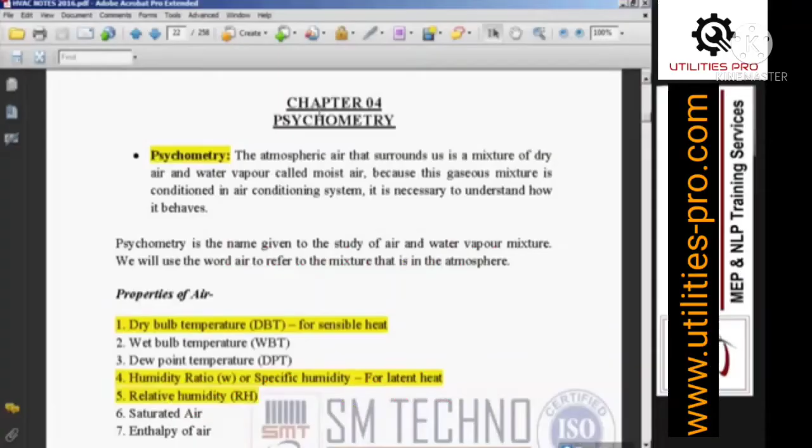Psychometry, chapter 4. Without psychometry, you cannot think for designing, HVAC designing.

So what is psychometry? This term is taken from Greek language, and the meaning is: psycho means air, metry means measurement. But air means what? Not just dry air. Air means we are talking about the moisture.

For example, in this room, simple experiment. What you do? Take the chill water bottle from the refrigerator and place it in the room. You can watch the video. After some time, don't open that bottle, suppose the bottle is sealed. So after some time, what happened?

On the bottle, you will find droplets, no? Yes. So from where you will get the droplets? From the air, means from the room air, because the bottle is sealed, right? So from the air we'll get that droplet, and that droplet is called dew. Why and how we'll discuss after learning dew point temperature. But with this we can conclude that the air is a moist air, right?

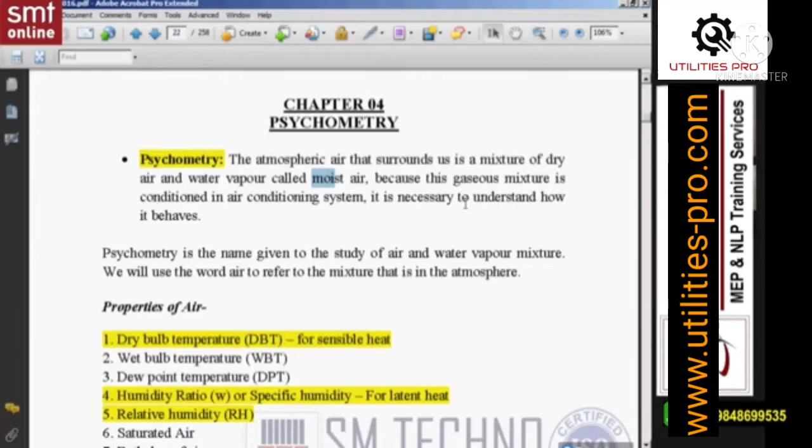So here you can read in the notes, the atmospheric air that surrounds us is a mixture of dry air and water vapor called moist air. Because this gas mixture is conditioned in air conditioning system, it is necessary to understand how it behaves. So what is psychometry? Psychometry is a name given to the study of air and water vapor mixture. We'll use the word air to refer to the air-water vapor mixture, and that is the atmosphere. So if I say air, means by default I'm talking about the moist air, right?

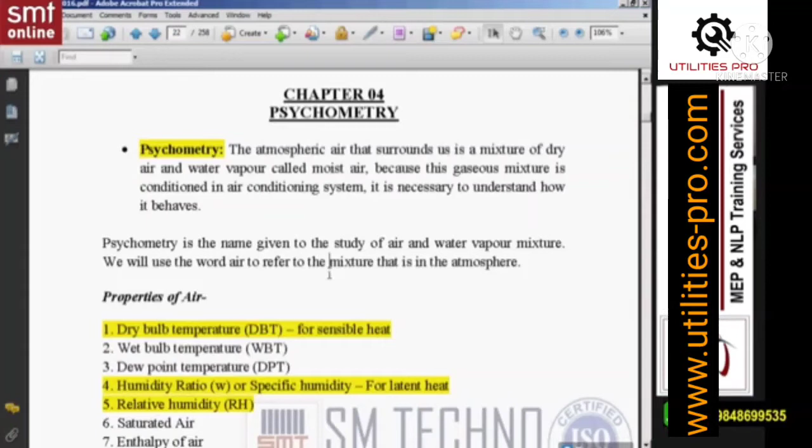So in psychometry we are going to learn the properties of air, the behavior of air, etc., which is very important for air conditioning, right? So let me read the properties first. Properties of air, you can read here from point 1 to 7.

Point 1 is dry bulb. So highlight 1, 4 and 5. Point number 1, dry bulb temperature, in short DBT, for sensible heat. Let me read this, then I'll explain. First is dry bulb temperature, DBT, and for sensible heat. Second is wet bulb temperature, WBT.

Next is dew point temperature, in short DPT. Next we have humidity ratio, also known as specific humidity, for latent heat. And next, relative humidity. Already we learned in the first class relative humidity, RH, for human comfort. So we'll discuss what is relative humidity and what's the difference between the relative humidity and humidity ratio. Next we have saturated air and enthalpy of air.

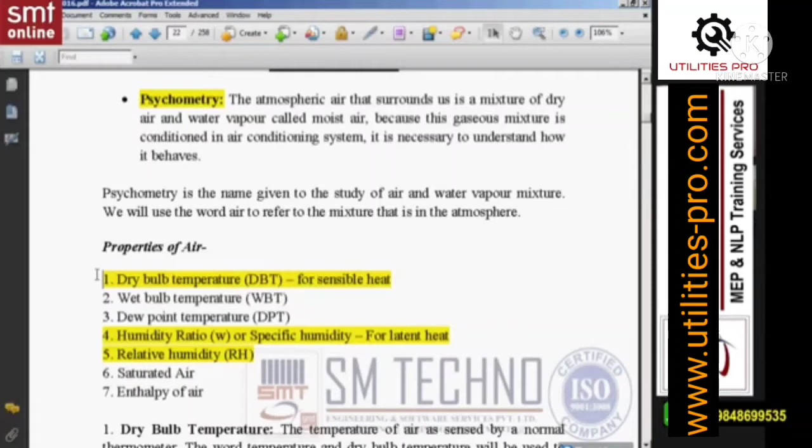Okay, so first, dry bulb temperature. This is simple. For example, if I measure, suppose assume, can you see the video online? Can you see my video? Assume this is a thermometer. Actually it's a digital pen, but think that's the thermometer.

If I measure the room temperature, or if I measure the outside temperature under shade, not directly in sunlight, means under shade, if I measure the outside temperature, means what am I measuring? I am measuring the dry bulb temperature. So don't confuse dry bulb temperature or the temperature, both are same with respect to air.

Suppose today outside temperature was 40 degrees centigrade, means I am talking about dry bulb. Present room temperature, let me check in the remote. Present room temperature is 26 degrees centigrade. Is what? It's a dry bulb, room dry bulb temperature. So temperature and dry bulb temperature both are same.

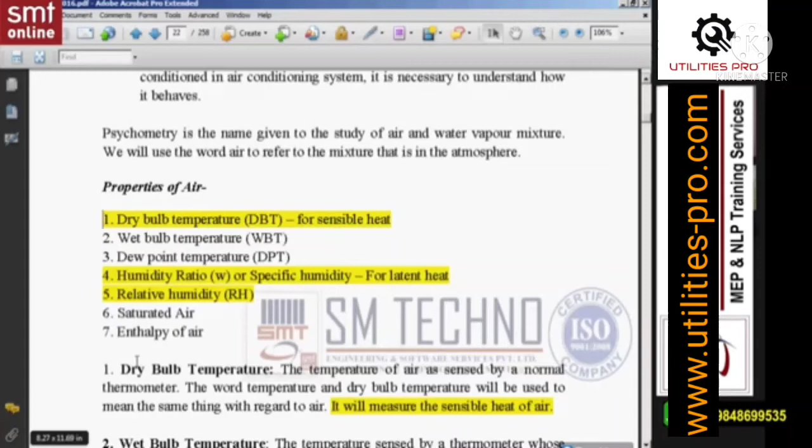But the important point is, the temperature of air as sensed by a normal thermometer, the word temperature or dry bulb temperature will be used to mean the same with respect to air. But this point is important: it will measure the sensible heat of air.

For example, heat transfer from outside to inside through wall. So what we'll do, we'll take the difference of dry bulb outside temperature minus inside temperature. Outside dry bulb minus inside dry bulb, the delta T we are using in the calculation to find out how much increase in heat. So remember, this is important. Directly we'll use this dry bulb temperature in calculation to find out the sensible heat of air. This is important. So for all the sensible calculation, we'll use this dry bulb temperature.

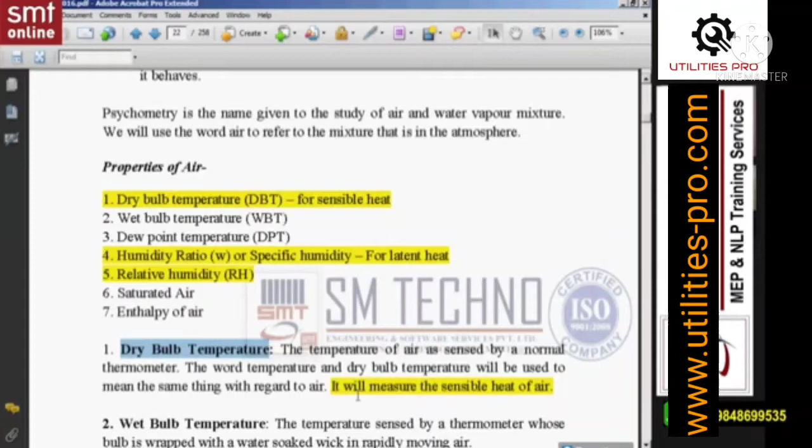How to use this is the next level - at the time of calculation, you will understand. But remember, at present, dry bulb temperature is used to measure the sensible heat of air. This is important, just highlight this, so later at the time of calculation you'll get the idea.

Next we have wet bulb. Any idea about wet bulb? Wet bulb, first of all, is not a natural or direct property of air. Like dry bulb is a direct property of air, but wet bulb is not a direct property of air. It is a property or value based on experiment.

It's a simple experiment, you already know this. I'll show you the procedure, then we'll discuss why we are finding this wet bulb. First, how to find out the wet bulb, then the purpose - because it's not a direct property, why we are finding it, but before this, how we are finding it. Simple. With the same thermometer, first I'll measure the dry bulb. Suppose room dry bulb I'm measuring, I got 30 degrees centigrade.

After that, what I'll do, I'll take a wet cloth. Can you see this cloth? Suppose it's a wet cloth. I'm going to dip it with water and place it on the thermometer bulb and tie it. But before this, I measured the room dry bulb - it is showing 30. Then after that, I'm closing this and tying the wet cloth, and I'm supplying the air, say 3 to 5 meter per second velocity, for example.

So after some time, what happened? This cloth will become dry. How will this cloth become dry? Because of evaporation. And evaporation requires heat - without heat, no evaporation. So when evaporation takes place, it will take heat from the supply, and at the same time it will take heat from the thermometer bulb, resulting in a decrease in temperature, say 26 - previously 30, now say 26. So 26 degrees centigrade is the wet bulb. This is the procedure to record the wet bulb. Clear? And remember, wet bulb is always less than dry bulb - it will only reduce.

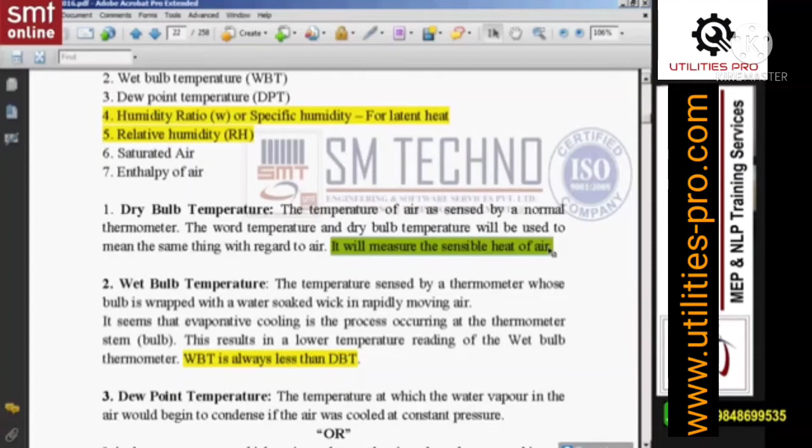Clear? Dew point temperature - this is also interesting. It's the temperature at which the water vapor in the air begins to condense if the air were cooled at constant pressure. Or in simple words, it's the temperature at which moisture leaves the air and condenses on an object, as dew forms on grass and plant leaves.

For example, as I said at the beginning, if you take a chilled bottle from the refrigerator, after some time without opening it, you'll find dew at the surface. Because of what? Because of dew point temperature. Remember, whenever the dew point temperature is attained on the surface, and when the air touches the surface, the air moisture loses heat and the water condenses and changes from vapor to liquid. Because of what? Because of dew point temperature.

And dew point temperature is not fixed like boiling point or freezing point. This dew point temperature will change based on other temperatures like dry bulb, wet bulb, etc. So we don't have a fixed value - we'll find it out using the psychrometric chart. But dew point temperature is the temperature at which condensation starts.

So in which season will you find more dew point temperature - summer or winter? Winter. So normally in winter, in early morning, you can see the fog. Fog is what?

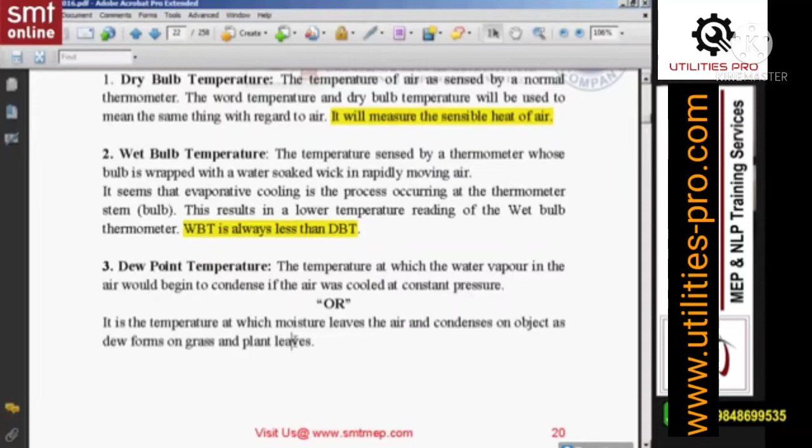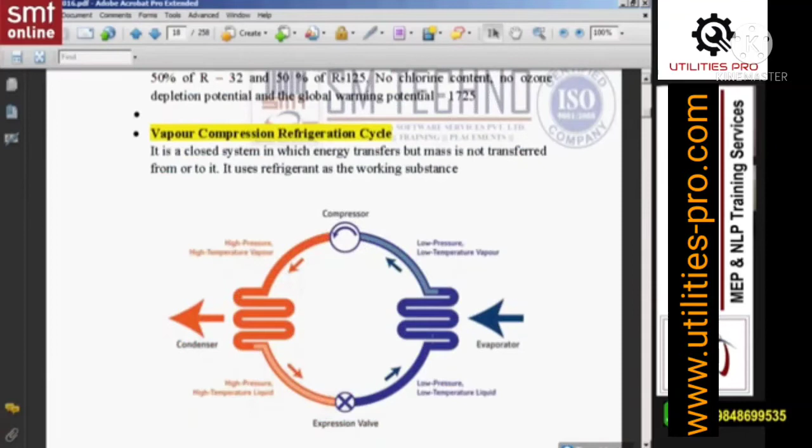But how is it related to HVAC? Go back to page number 16. So on page 16, we learned you get cool and dry air. Dry air because the refrigerant is low temperature and flowing inside. So at the surface of this evaporator coil you'll find temperature less than or equal to dew point temperature, and when the air touches this coil, what happens? The air has moisture, the room air. So the moisture gets condensed on the coil. So the moisture is separated on the coil, and that's the reason you get cool and dry air.

Condensation of refrigerant inside the coil, this is called condenser. But evaporation of refrigerant inside the evaporator, this is called evaporator. At the outside of the evaporator, at the surface, when the air passes through, this coil has temperature less than or equal to dew point temperature. So the moisture from the air is condensed on the surface of this pipe, and you get cool and dry air because the moisture is separating.

Another thing you'll notice, you get water from window and split AC. So the water from where? From the room only, because of dew point temperature. And this is latent cooling, a change of phase. Dry air because of dew point temperature. So I hope the dry air concept is clear now, because after learning dew point temperature you can understand it, right?

Clear? Now one interesting question. So in which season will you find more dry bulb, more wet bulb? In winter season, right? Now one question here.

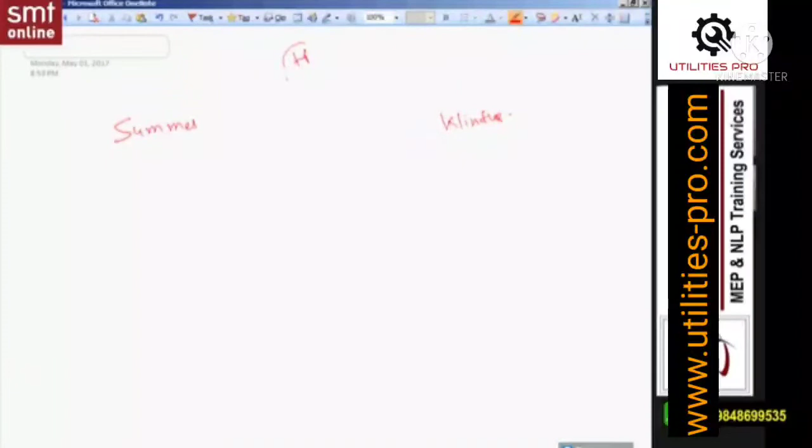So my question is, in which season will you find more humidity, meaning more moisture - summer or winter? The correct answer is summer. Why summer? Because in summer the temperature is more, and more temperature means more evaporation. More evaporation means more moisture in the air. I'm not talking about desert areas - desert area is a special case. In general, if you speak, you'll find more humidity in summer.

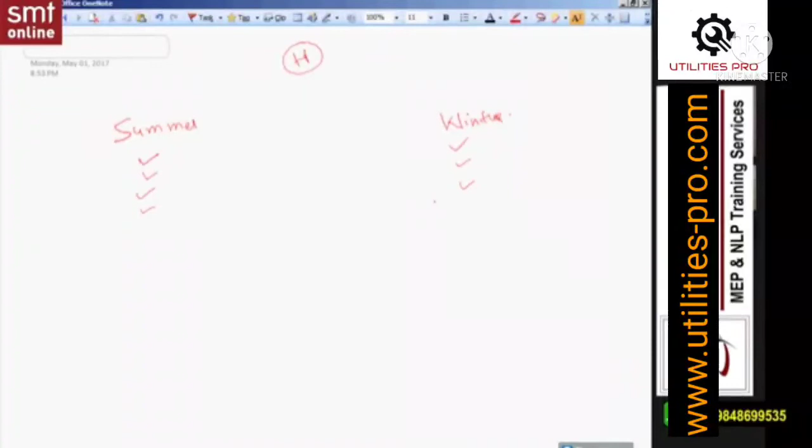If you go back to page 16, the evaporative coil extracts heat as well as moisture, which is required in summer. This same coil is the evaporator, remember this is important, we'll use this point later for machine selection and classification. In the evaporator, the air loses heat as well as moisture, so you get cool and dry air, meaning cooling and dehumidification, which is required in summer.

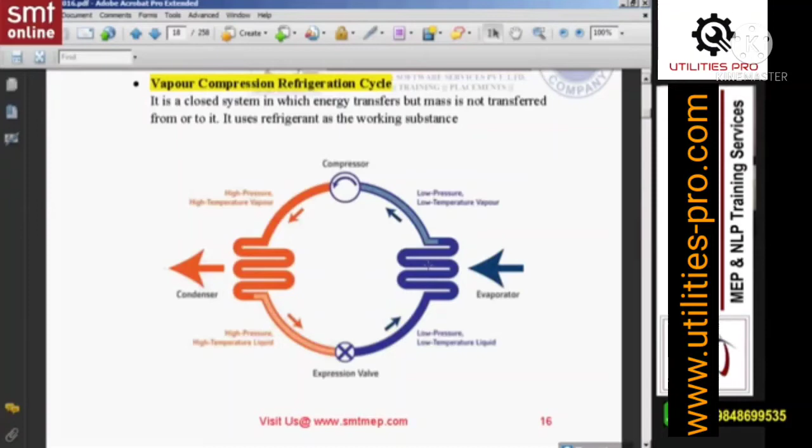What is humidity? Moisture present in the air.

Humidity ratio means the moisture per unit volume. Suppose if I measure the moisture of the complete room, that we can call humidity. But if I measure the moisture per kg of air or per pound of air, we can call it humidity ratio. So it is also called specific humidity.

Specific means per unit volume, or moisture content. It's the mass of water vapor present in 1 kg of dry air, generally expressed in grains per kg of dry air in the metric system, and grains per pound of dry air in the English system. 1 pound equals 7,000 grains.

But the important point is, highlight this: it is used to find the latent heat. Remember, for sensible heat we use dry bulb, for latent heat we use humidity ratio, because with humidity ratio per unit volume we get the moisture. We multiply with the total volume to get total moisture, then multiply total moisture with the specific heat of moisture to get the latent heat in the calculation at the next level. So remember, dry bulb for sensible, humidity ratio for latent heat. This is important, we'll use this value directly in the calculation.

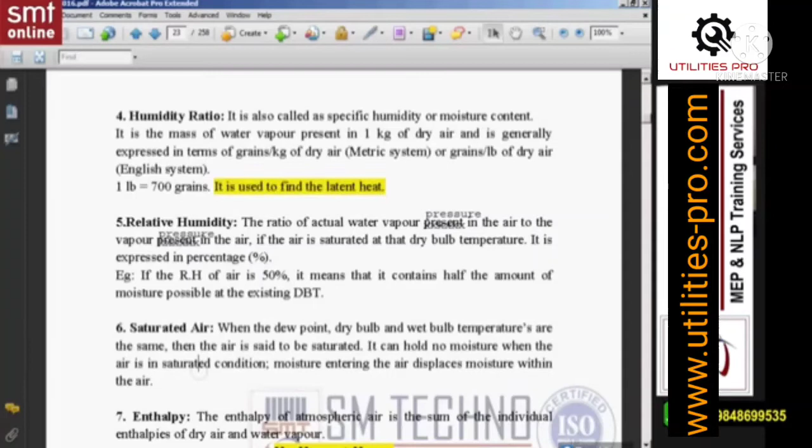Humidity ratio means moisture present per unit volume, and humidity means total moisture. But what is relative humidity? We'll discuss now. Relative humidity means we are relating, we are comparing with what? I'll give you a simple example to understand the concept.

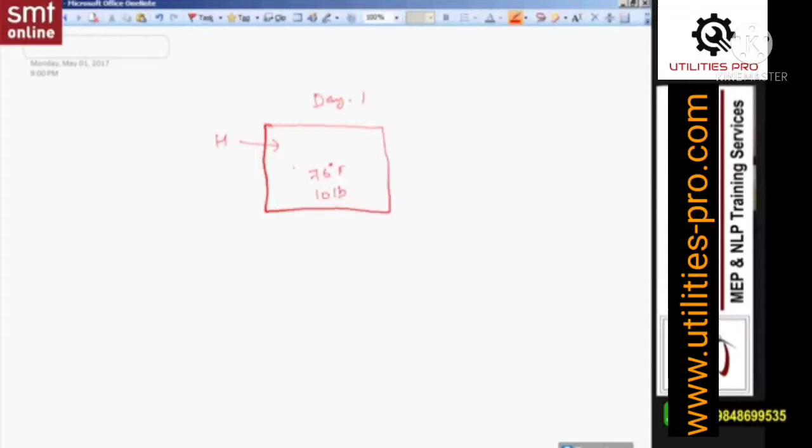For example, day 1. Suppose this is a top view of the classroom. On day 1, I am maintaining 76 degree Fahrenheit, and by using a steamer or humidifier I am adding moisture. After 3 hours when I measure, I got 10 pounds. After 4 hours, 5 hours continuously I measure, I got 10 pounds only. It means at this temperature the maximum possible moisture content is 10 pounds. So what is the RH?

100%, meaning the air is saturated. Maximum moisture, air is saturated. This is the maximum case. This is the saturated case.

Day 2, same classroom, but this time I'm not adding any moisture. I'm maintaining only 76 degree Fahrenheit. But when I measure the moisture level, I find 5 pounds. So how much will be the RH? 50%. On what basis is it 50%? Because we know that 10 pounds is 100%.

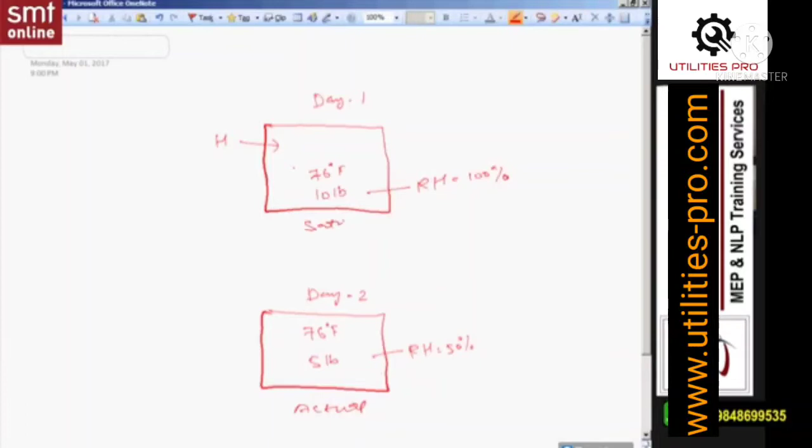So what we just did is compare the actual condition with the saturated condition. This comparison, this relation, is nothing but relative humidity—meaning how much is the maximum possible moisture compared with the present moisture at the same temperature. You cannot change the temperature. You cannot compare with a different temperature. Why?

If you increase the temperature, say from 76 to 90 degrees Fahrenheit, RH also increases. Why? Because increasing the temperature also increases evaporation. The holding of moisture by the air will increase by increasing temperature. So you cannot compare it with a different temperature.

At the same temperature, how much will be the maximum possible moisture, compared with present? That relation or comparison is nothing but relative humidity.

Remember, for human comfort, whatever temperature you are maintaining, as per that temperature, what will be the maximum possible moisture? Compare with that. If you maintain 30 to 60%, for calculation we take 50% as a standard for human comfort.

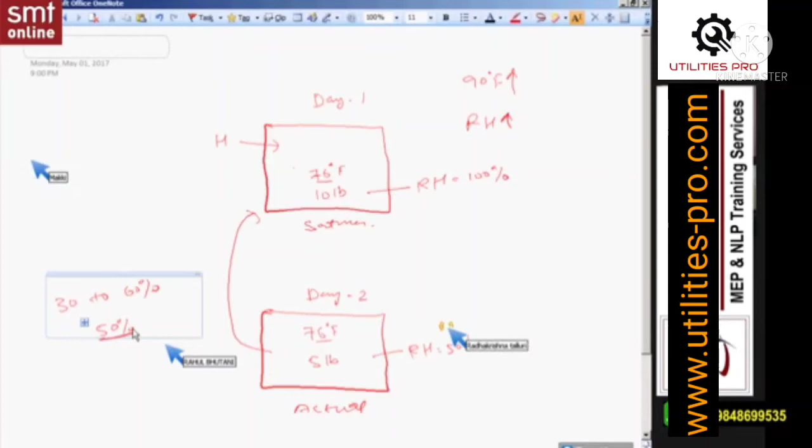And the same comparison we can do theoretically in terms of pressure. As the moisture increases, the pressure increases. As the moisture decreases, the pressure decreases. So the ratio of actual water vapor pressure in the air to the vapor pressure in the air if the air is saturated at that dry bulb temperature.

Meaning actual vapor pressure compared with the vapor pressure when the air is saturated at the same dry bulb temperature—that comparison is nothing but RH, expressed in terms of percentage. Example: if the RH of air is 50%, it means it contains half the amount of moisture possible at the existing dry bulb temperature. As we discussed, when RH is 100%, air is saturated.

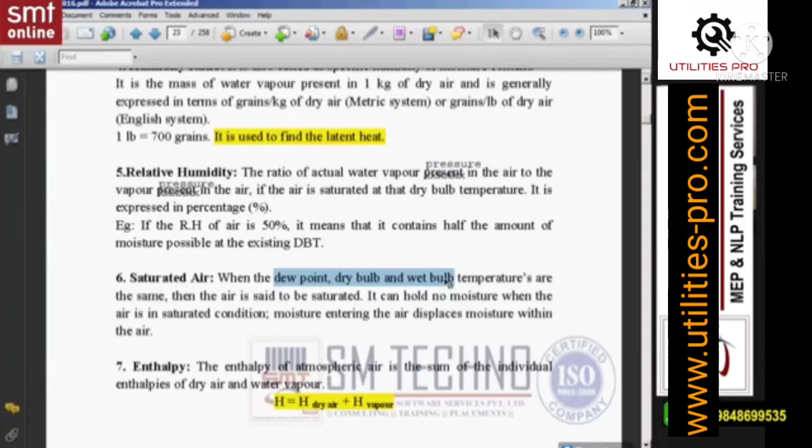Apart from this, when the air is saturated, dry bulb, wet bulb and dew point temperature will be the same. This is also one condition of saturation. When the air is saturated, if you are adding moisture, the old moisture is replaced with the new, but the total quantity will remain the same. So it's saturated air.

Enthalpy we already learned—enthalpy is heat content of the body. But again, why are we learning enthalpy? Because in the air we have dry air as well as moisture. So we have dry air heat as well as moisture heat.

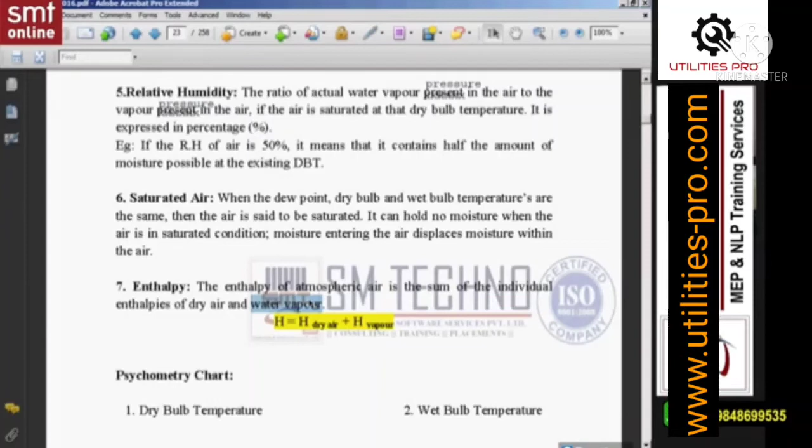So the enthalpy of atmospheric air is the sum of the individual enthalpies of dry air and water vapor. The summation of both enthalpies is the total enthalpy of air—heat content of dry air plus heat content of the vapor is the total enthalpy of air.

Next we'll learn how to use the psychrometric chart. First I'll show you these properties, because in the psychrometric chart all these lines together can get confusing. So first, with this simple line diagram, in the psychrometric chart, dry bulb is represented by what?

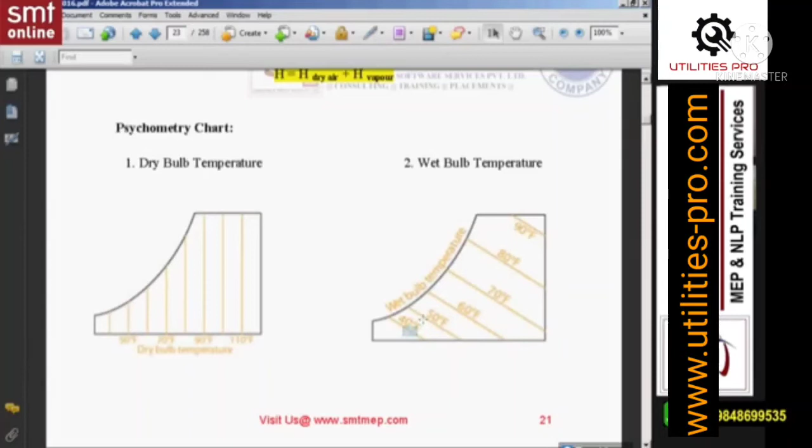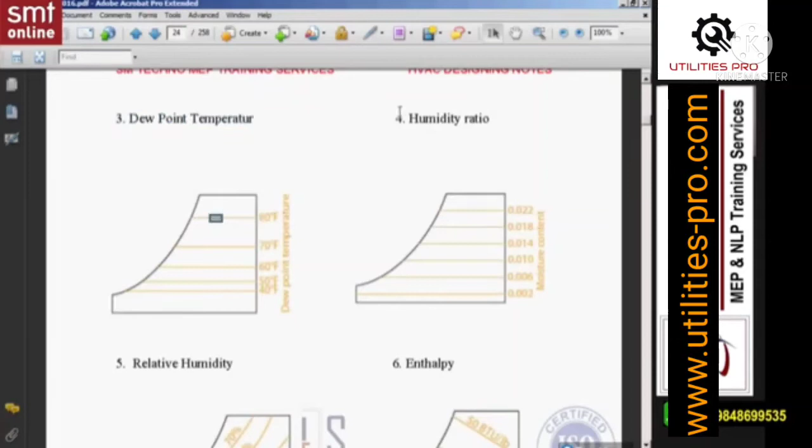Vertical lines—you see vertical lines. And wet bulb with the inclined lines. Wet bulb as well as enthalpy are shown with inclined lines, but with different scales. Similarly, dew point temperature on screen is a horizontal line, humidity ratio also a horizontal line, but different scales.

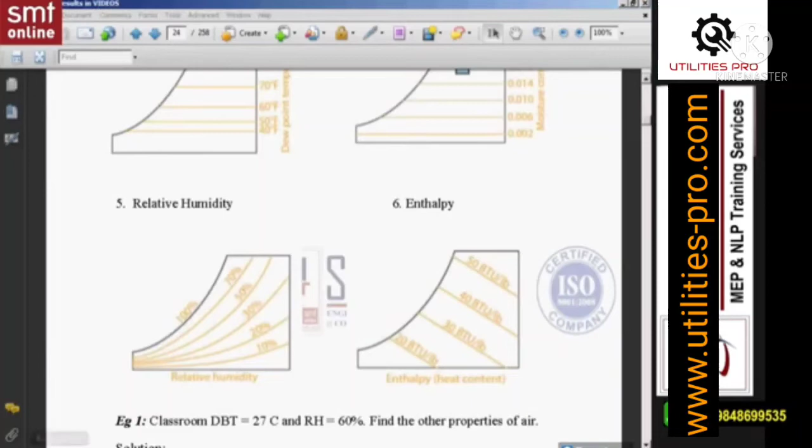And this curved line represents RH, relative humidity. Now I'll show you the same thing in psychrometric charts. This is a psychrometric chart from the Trane company, but psychrometric charts have a standard. With the Trane company chart, we have an advantage—you get a separate scale for dew point temperature, not available in other psychrometric charts.

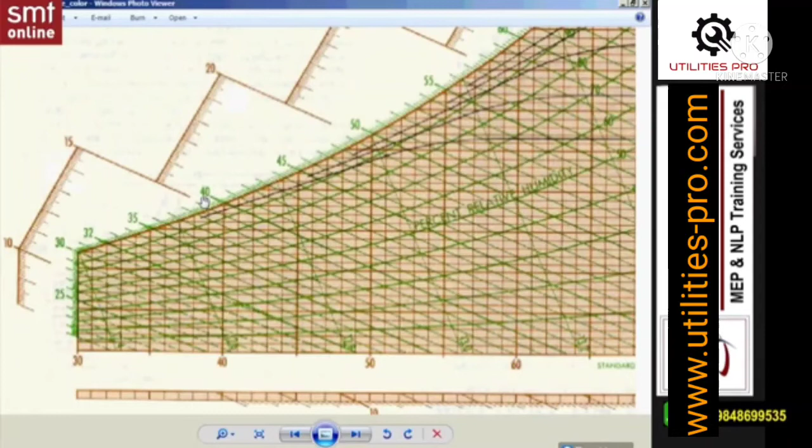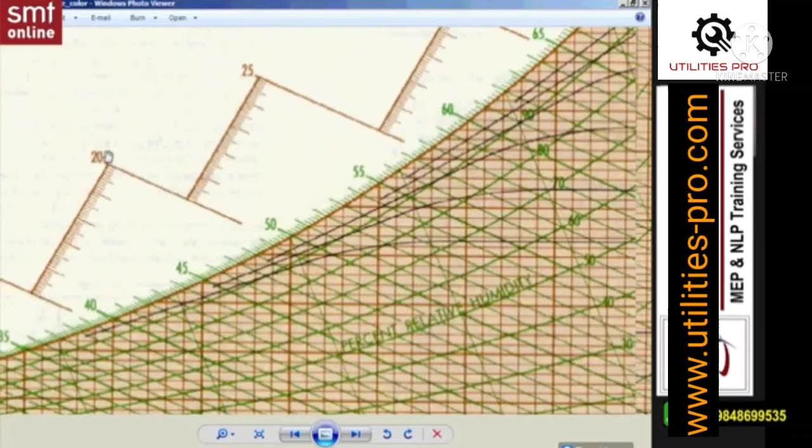Inclined lines towards left, 40, 45, 50, what is that? Wet bulb temperature. This scale is for wet bulb. And with the same inclination, if I go above 50, I can read 20. That 20 is enthalpy. So wet bulb and enthalpy both use the same angle, same direction, but different scale.

Next, if I go straight horizontal and stop here, this 80 is humidity ratio. It's horizontal. Unit is grains per pound of dry air, English system. Then if I continue horizontal and stop at this point, for example 60, that is dew point temperature.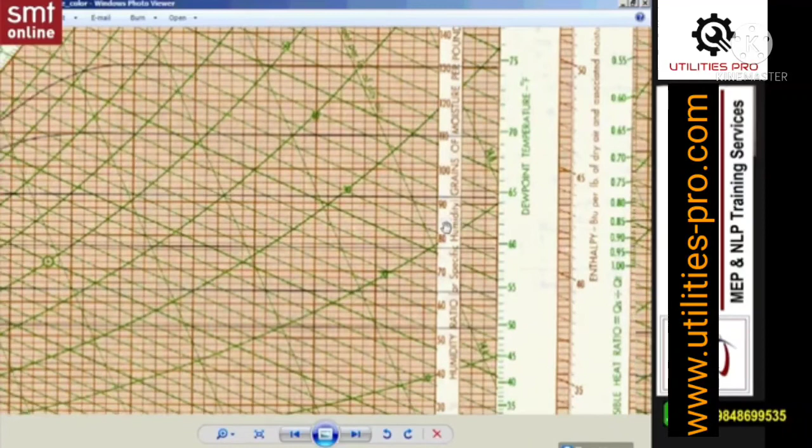So humidity ratio and dew point temperature both use the horizontal direction, but different scales. Similarly, wet bulb temperature and enthalpy both use the same direction but different scales. And at the bottom, this is dry bulb.

Now, if you talk about these curved lines, can you see the curved line? You see, this is 10, 20, 30, 40, 50, 60, 70, 80, 90, 100. These all represent RH, relative humidity. And this last curve, for RH 100%, you can write as page number 16 in the data book.

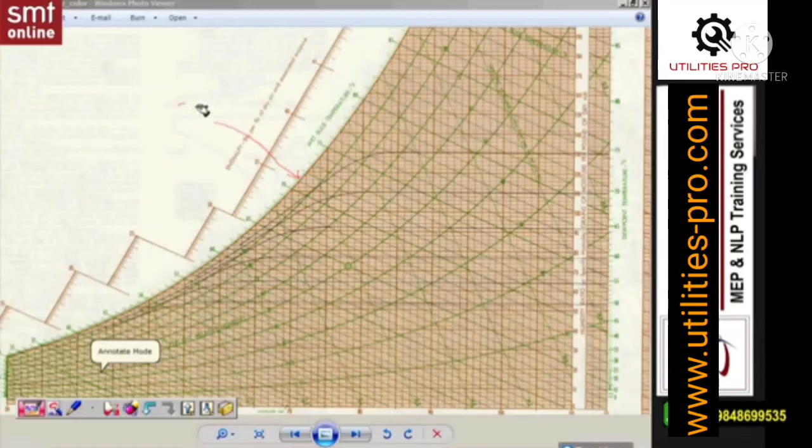You'll find the same chart there. And you can write this as saturated curve, where RH equals 100%.

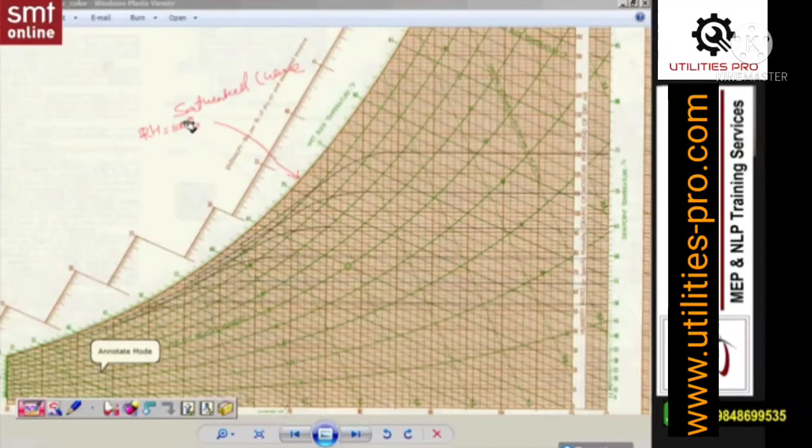How to use this? Very simple. Don't confuse this with a dense chart. This is very simple to use. If you know any two properties of air, you can find any other property using the psychrometric chart without any experiment.

And how to get the two properties? At the time of load calculation, dry bulb and wet bulb of different cities you'll find in the data book, and we'll use those at the time of calculation. But at present, I'll assume some values to learn how to use this.

So we'll do example 1. Example 1 I'll show you, example 2 you can try. Start writing. Maintain separate notes for calculation, because all the calculation we'll do in the class. Maintain a separate book for calculation, because these are simple calculations, but when we start load calculation we'll go through all the load calculations from different sources. Theory you can follow from the printed notes, but calculation we'll do in the class.

So start writing online in classroom. Example 1. For example, let me find out the condition of this classroom. You can write classroom dry bulb temperature 26 degree centigrade. You see at present in the remote it is showing 26 degree centigrade, so I am using the same. So 26 degrees centigrade, and relative humidity.

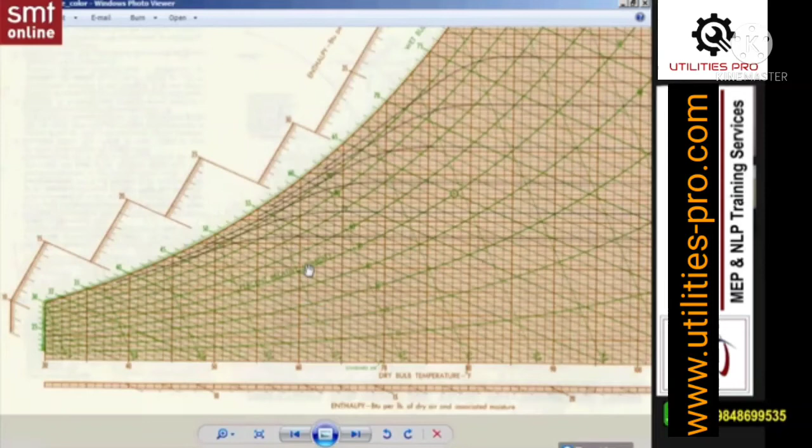Very simple. If you know two properties, with the two properties find out the point. When you get the point, go in different directions, you'll get the properties. So on screen, online and classroom, 27 degrees centigrade - sorry, 26 degrees centigrade. But you see this chart belongs to the English system, so Fahrenheit.

So quickly convert 26 degrees centigrade into Fahrenheit. Do it now. Yeah, 78.8 is correct online. So I am rounding off to 79. You know, round off is applicable.

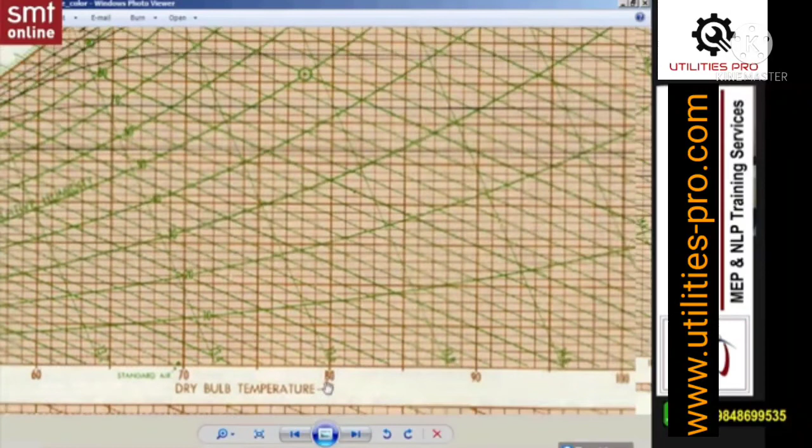Now online and classroom on screen - don't try, let me show you this first. So 79 is here. You see, this is 70, this is 75, this is 80. So 75 to 80 means 5 divisions, means each division is 1 unit. So this I can mark as 79.

This 79 and 50% RH is here on screen - on screen 79, 50% RH. Both will meet at this point, right? Straight up, then curve, slide. So this is a point.

When I get the point, if I go in this direction, I get very close - I'll take the rough value because in software you can get accuracy, but here I can take the rough value. So when I go straight here, 65, 70, so this is 66. So WBT is how much? 66 degree Fahrenheit. Now if I go beyond this, if I mark here 30, 31, enthalpy is what? 31 BTU.

With this point, if I go straight right, if I mark here, this is 70, 80, so 10 units but 5 divisions. So 74, 70 - this is 72, 74, because 5 divisions and 10 units, so each division is 2 units. So this is 72, 74. 74 is what? W means humidity ratio, 74 grains per pound of dry air.

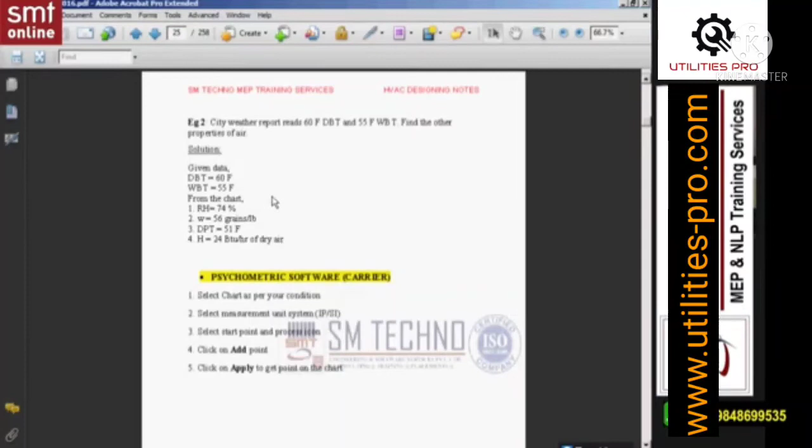Verify the result from your notes, page number 23. The same example is given. You can verify the value with your calculation from the notes, but try this at home and verify it.

From the beginning: first, select IP or SI, whichever system you want to use. Very simple, and for now I'm using IP. Anyhow, you know the measurement system and the conversion, since we already learned it in chapter 3. If you know the concept, you can try with any system.

But it's your responsibility to try in both systems, because at present you don't know which company you'll get a job with and which system they use. Many consultants deal with mixed units—for example, CFM for flow rate and MM for ducting. So MM is metric and CFM is English, and you must know both. Once you understand the concept, try it in the other system too.

So click IP for now. Next, can you see this icon with the line and dots? This icon is for state, point and process. Click this and you'll get the window.

In this window we'll add a new point. Go for 'add a point', and we'll take Example 1, which was the classroom condition. I'm writing CR for classroom. For the classroom we know the dry bulb, right? 79, same as yesterday's example.

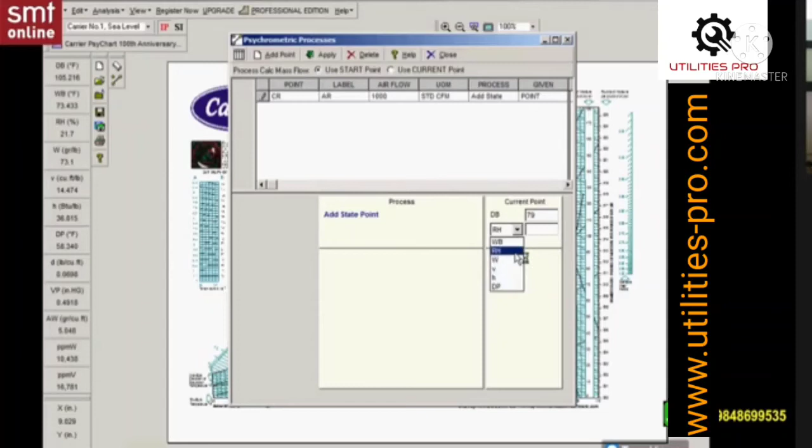And we consider RH as 50%. So first, enter dry bulb as the default parameter required. The second parameter can be any other property, so we consider RH at 50%. When you enter 50%, you'll get all the values.

We can verify now: wet bulb is 65.8. What did we get yesterday? Here you see wet bulb 65.8 at 50% RH, using Fahrenheit, with dry bulb 79. What was the wet bulb yesterday? We got 66—here you see 66. Dry bulb 78.8, so about 79, right?

And here at 50% RH, I'm talking about wet bulb, not W—W means humidity ratio, WB means wet bulb. Yes, online. How much was the wet bulb yesterday? Find that from yesterday's example.

Give me that notes, give me your notes. 26 what degree centigrade? We convert into Fahrenheit now. Why are you so confused? You see, example 1, WBT is 66. There's a difference—65 here.

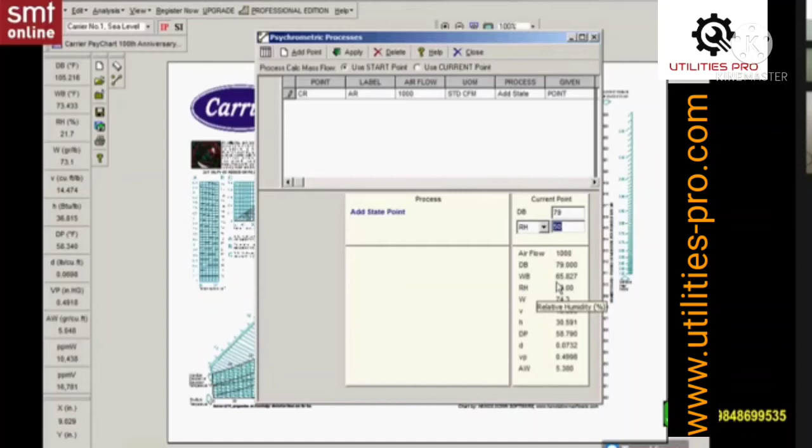And again we need to check in the manual, because you won't get this much difference. WBT online, how much? WBT, wet bulb, number 16 in the data book. Okay, I'm again in the software.

First decide the system, next go for state, point and process, on screen, add a point. The point name says CR, dry bulb 79, and RH we are getting 50. Once again: 79 here, 50%. The point is here.

So on the right side, this 75—what is it? W, humidity ratio. But WB is inclined here, so nearly 66, not exactly, nearly 66.

Now update it in the notes. Yesterday I gave 60 WBT—it's not 60, it's 66 degree Fahrenheit. Please update online and in the classroom notes: degree Fahrenheit, wet bulb. Enthalpy is here, this is 31, that is correct. And what about W, humidity ratio—how much did you get yesterday?

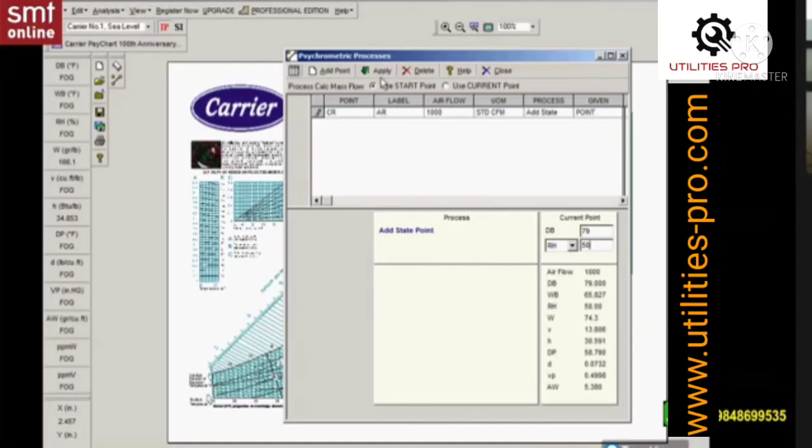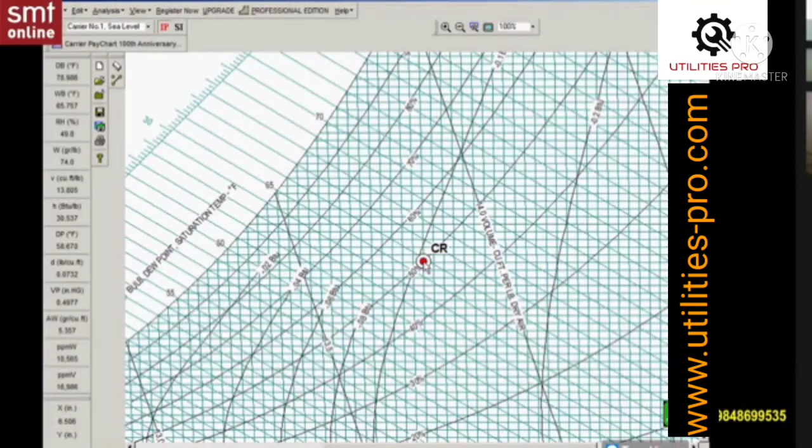And what about dew point DP online? 58.7, so we'll take 59, na? Right? So after verifying, simply click on screen, click apply. When you click apply, what happened? The point will be available on the chart. Can you see the point? And when you take the cursor near to the point, you can read all the values instantly at the left column. Again, if you want to get the information correctly, click the same point, you'll get the point here.

Okay, this was example 1 and we did example 2 now. So for one more point, same procedure, add a point. This time city weather report, means the point name is city. And in this case we have dry bulb 60, and WB 55, right? So when you enter this 55, you can verify now. RH, how much you got yesterday?

Not completed, not done, okay, you can copy this. RH is 73.28 means 73%. You can verify, you'll get very close. And enthalpy 23 BTU and dew point 51.4 means 51 degree Fahrenheit.

So in this way you can find out these values from this psychrometric software if you are dealing with manual load calculation. But if you are using HAP software, automatically you'll get all this information by software if you enter the city, elevation, latitude, longitude, etc. This is more accurate compared to the manual chart.

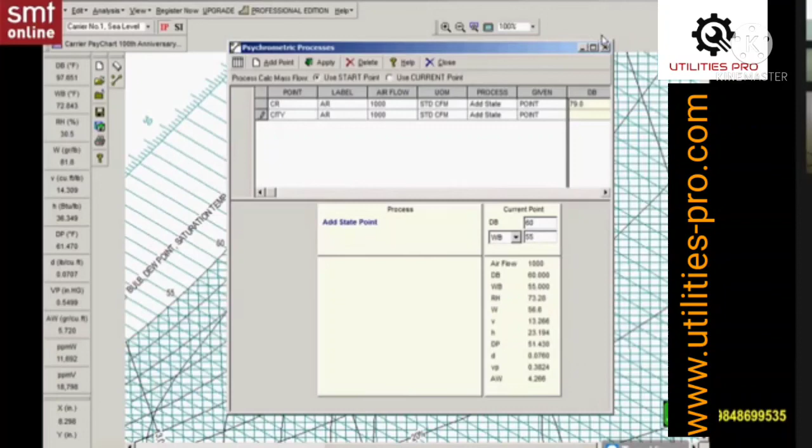We'll use at the time of calculation. For all the cities, dry bulb for the hottest day for summer, for the minimum temperature in winter, and maximum temperature for summer. Both the dry bulb is available almost for all the cities in data book. At the time of calculation we'll use, and with that dry bulb you'll get the wet bulb because wet bulb also we can measure, na?

So this 2 property by default you'll get from the data book at the time of calculation for any city. At this level simply we are learning how to use this, right? We are not using this in the project. When I start the project, we'll pick this dry bulb, wet bulb. If you want, you can refer page number 22 data book just for your reference. Anyhow, we'll use that one at the time of chapter 6. Instant at present, just open data book page number 22.

You can check the values for different cities and you can find out at present for Hyderabad because the first sample project is Hyderabad. Then we'll go for US project, then one Gulf project, Villa project, data extraction. So in data book page number 22, for Hyderabad you can find out the dry bulb and wet bulb. For reference, but don't worry, we'll discuss that table in detail in chapter 6, building survey. At present we are learning the basics for load calculation. Next, clear?

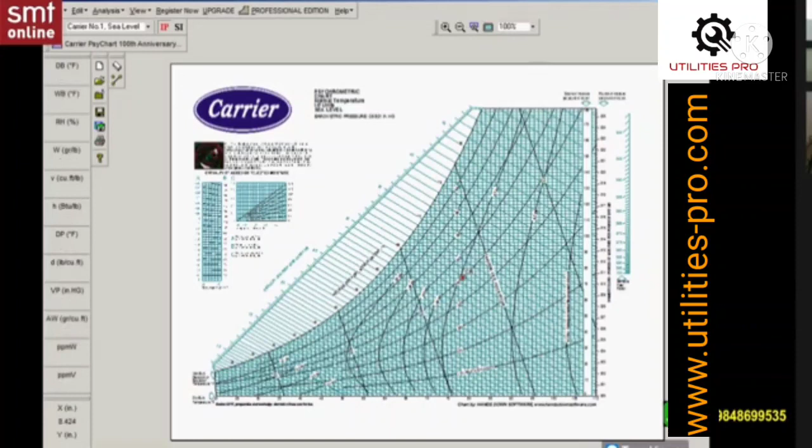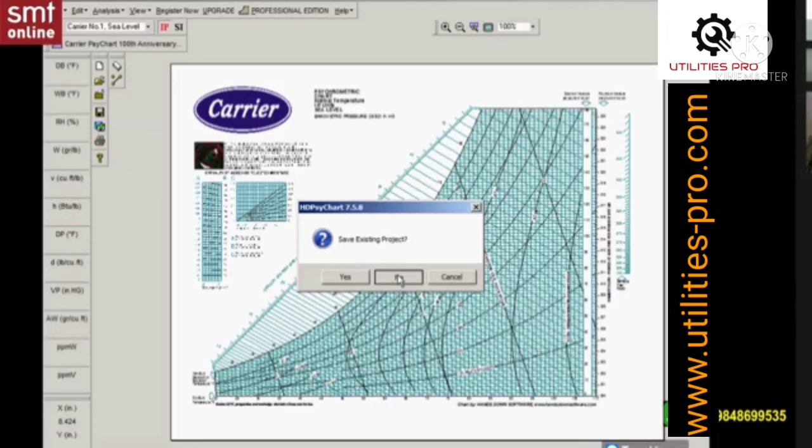Don't worry, what you are learning, you learn these steps thoroughly. All this will use at the time of load calculation. Then you can understand why we are learning this one. So at present just don't think that this is not used or something is not required. Everything what we are learning will use at the time of load calculation. And with this we did chapter 4. Apart from this, in psychrometry we have some more points to discuss, like sensible heat ratio, humidification, dehumidification, and this one more option, contact factor, bypass factor. All these topics we'll discuss at the time of load calculation.